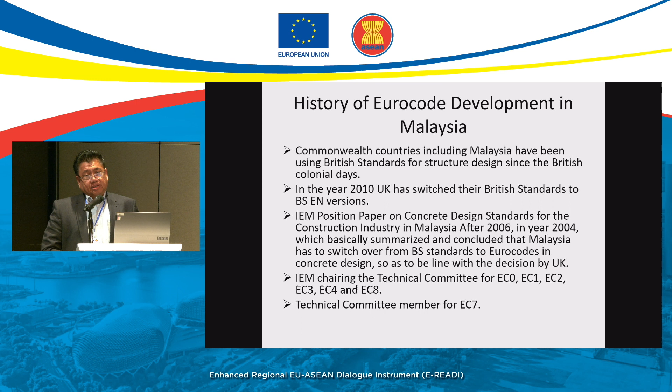So in the year 2004, the IEM position paper on concrete design standards was submitted, and we concluded that Malaysia will switch from BS, British Standard, to Eurocodes. So it is in line with the UK decisions. From there on, IEM is chairing most of the technical committees on Eurocode 0, 1, and 2 for concrete, 3 for steel, and, sorry, it is not EC4, should be EC7, and 8. For EC7, I think IEM is technical committee members.

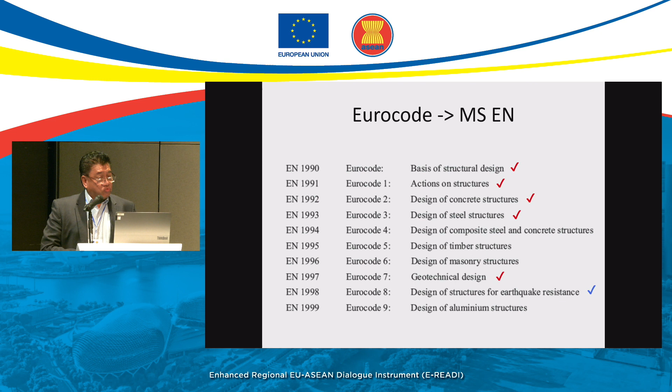So as you all know, there are many parts of Eurocodes. We have 0 to 9 for the first generation Eurocode, and we're going to have more, I think, for the second one. And Malaysia has gone through 0, 1, 2, 3, and 7, and now on 8. I'm involved with a lot of them for Part 1 and Part 2.

Well, why do we focus also on earthquake? It is a blessing that we changed to Eurocode because British Standard doesn't have any requirement for earthquake. So when we move to Eurocode, it is easier on our part to develop. We just adapt and adopt and then come up with our own national annex.

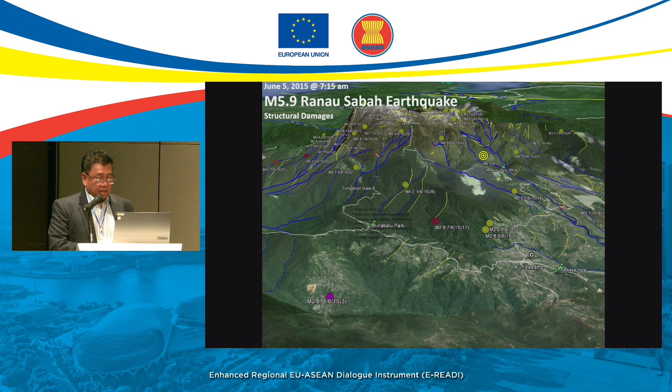And then even the schools in Ranau, most of the schools, we have a lot, I think more than 30 schools, have the same kind of damage everywhere because they are designed with weak column, strong beam. So for earthquake, we should design for strong column, weak beam. And we had a slight collapse in one of the resort areas in Mount Kinabalu. So this is, I think, the first time that we faced failure and damage to our structures.

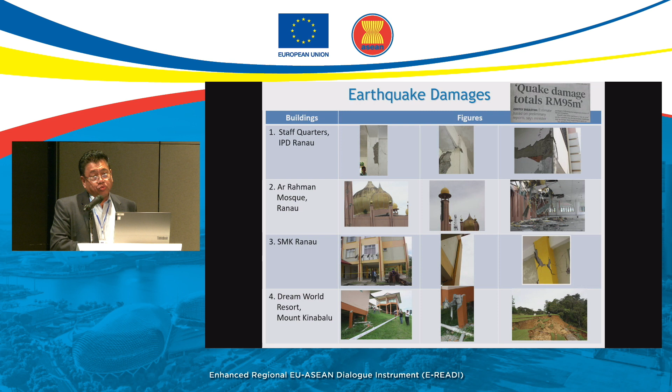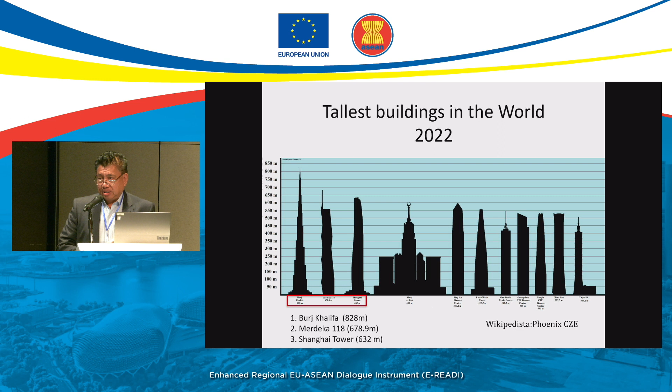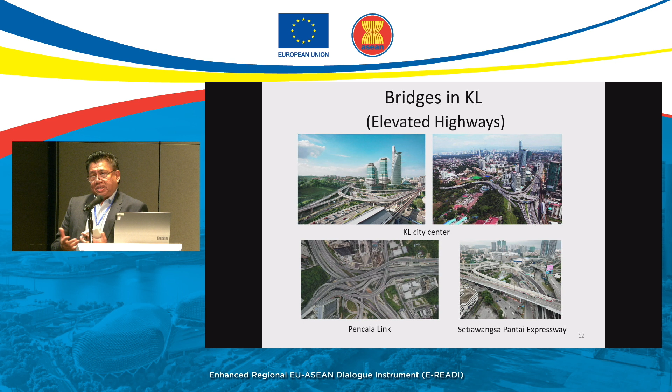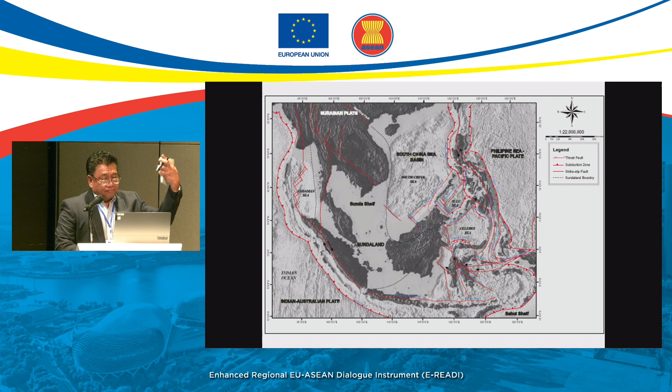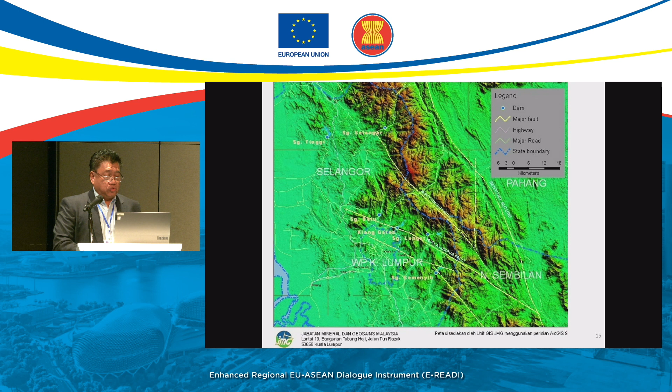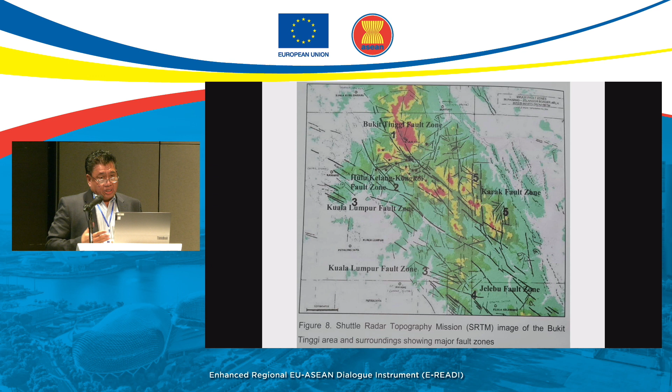So in this scenario, if we want to design for earthquakes, we have to look at the active faults around us. These are the active faults that we have, and some of the earthquakes that have happened in Peninsular Malaysia, as you can see here. Right in KL, we have had some earthquakes in the northern part of KL, about 20 kilometers away, in the area we call Bukit Tinggi. These are active areas, and we think this could ignite some bigger earthquakes later on, so we have to be prepared. As you can see, the faults are not only in the northern part, but also inside the KL area, but we don't know yet whether they are active or not. That is the challenge in terms of the geological aspect.

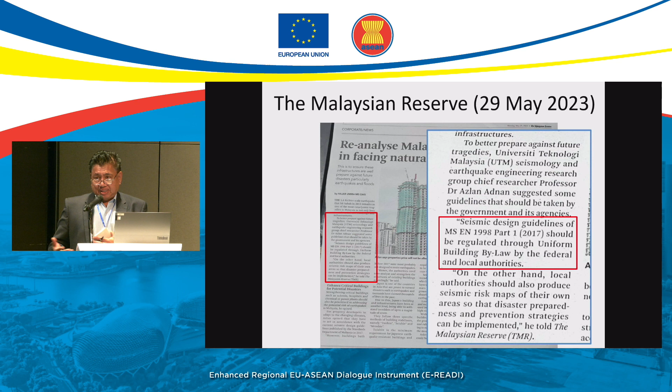So I was asked in this and gave some explanation to the press. And I was saying that we have been practicing this since the year 2017. And in another article in the Malaysian Reserve, I have highlighted that we have used seismic design guidelines of MS EN 1998. So I am also promoting Eurocode here, Part 1, and it should be regulated through the Uniform Building By-Laws. So that's another problem that we have. We may have the guidelines, but what about the implementation and the regulation?

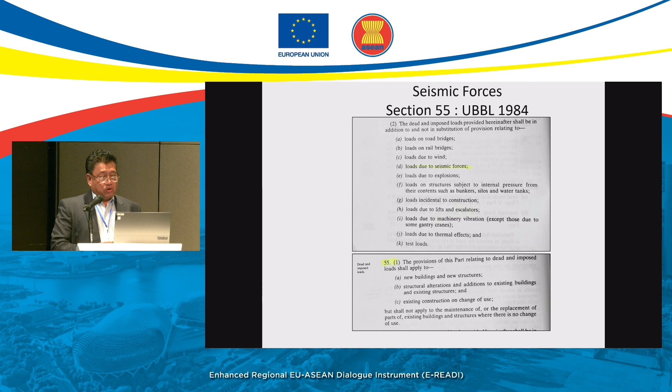So in terms of the development, we were quite surprised when I checked again: in the year 1984, our Uniform Building By-Laws had already included these seismic forces. So by right, all professional engineers have to follow this regulation, but there's no implementation or enforcement on this. And they also give guidelines on existing buildings. What should we do? So in Eurocode 8 itself, we have 6 parts. We have already completed Part 1 on the general rules, seismic actions and rules for buildings. And now we are going towards the bridges. It's just the right time for us.

So what are the documents that we need? I would just like to show you. Maybe some of you have no idea what it looks like. That is a British Standard. So we follow the British Standard, BS EN, and then we just change it to MS EN. So this is the document. You don't have any idea how thick the book is. It's just like this, not that thick, around 200, 300 pages, something like that. You just change the front page for this one.

This is the main document, the main frame. So a lot of things fall under it. And this is the Malaysian annex. See, very thin, just about 50 pages. So I think it's no problem for us to develop. We follow the format of the British Standard. It's quite easy because we just put down the table: what the UK and Eurocode recommendations are, and on the right side we put our recommendation. So I think it's not that difficult, and it is very systematic. We just deal with the national annex and change whatever we want, but we need a little bit of study. I will show you how we do it.

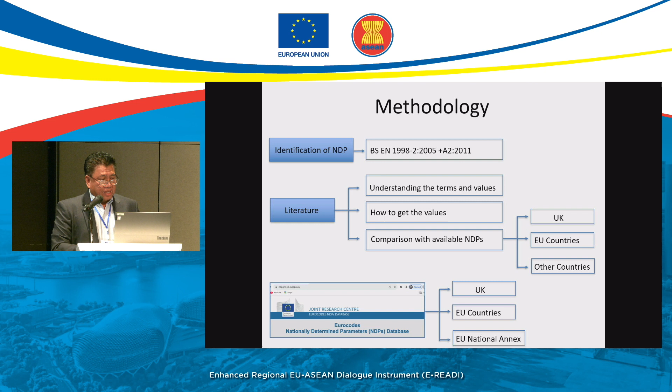So those are the websites, and we can get access to the UK, EU countries, and also the national annex, the NDP, meaning you can get access to every country's national annex in there. So I think we have about 30 to 40 countries from there.

So I have about 5 minutes, yeah.

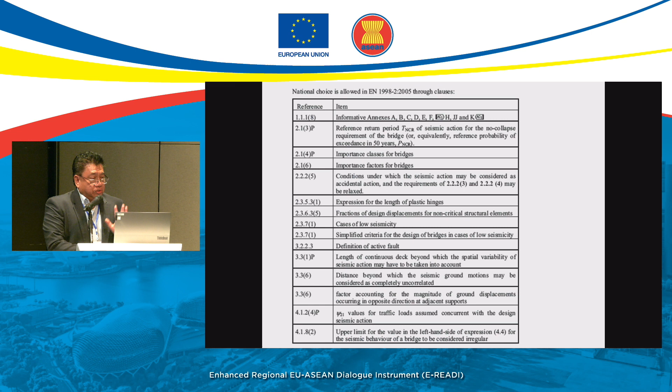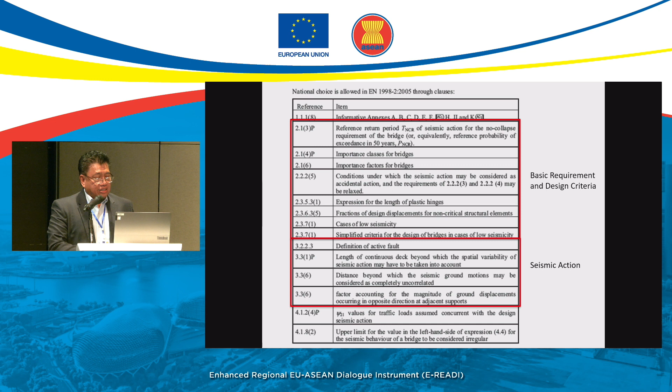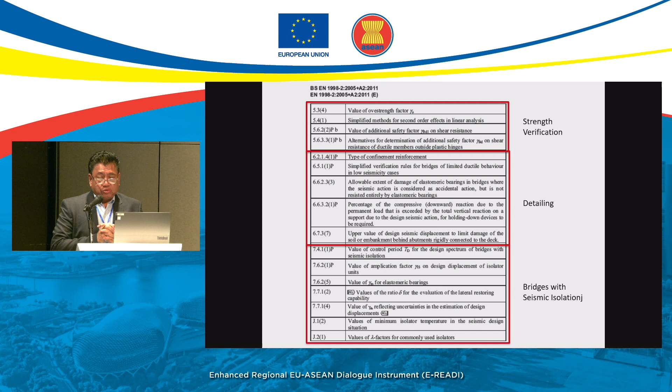So these are the NDPs that we have. So there are sections that we divided them to: basic requirements, seismic action in sections 3 and 4, analysis in chapter 5, strength verification, and we have detailing and bridges with seismic isolation. So those are the 6 items.

And what we did, we divided them into groups led by a few universities, like for chapters 2, 3, 4, led by me and some other members from other universities, including UMS, University of Malaysia Sabah. And then we have other chapters led by Defence University, University of Science, and Malaysia Rubber Board. So it's important to get Malaysia Rubber Board, the research institution of rubber, for the seismic isolation because we use rubber for that. So these are the groups.

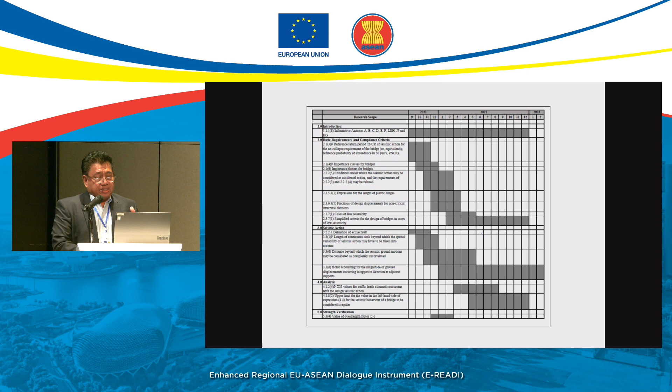Then we put the timeline or the Gantt chart for each of them and how we can achieve every NDP in there. And then we have milestones. So we have to submit reports at each stage of the study.

So the first stage of the method is to know what the NDPs are. So we make it simple. What are the NDPs? And then what does it mean? In this case, the fault. What does the fault mean? The active fault. So there is a definition of active faults, which is it has to be still active within 11,000 years, with the movement of a plate of about 1 millimeter per year.

So you can also decide yourself, if you have studies on that, active or not, how many years that you expect, the duration, that can be determined as an active fault. But this is like scientific studies. Everybody accepts this 11,000 years, so we just do it. So as you can see, most of these NDPs are acceptable for us because they are based on research everywhere. It's almost the same, but only where it involves geography, geology, then we have to do it ourselves.

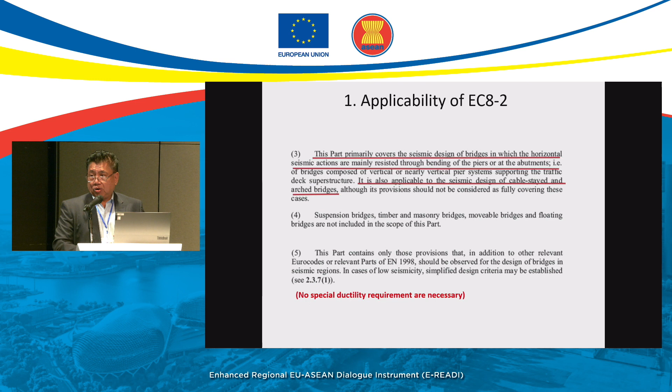So it's good because why? In Eurocode, they mention to you what this code is for. Like in this case, it says it is for columns in bending, and it is applied for cable-stayed and arch bridges also. But it does not include the suspension bridge, timber, masonry, movable bridge. So it's good for us as engineers to know right away which bridges we can use this code for. It just tells you all that right away.

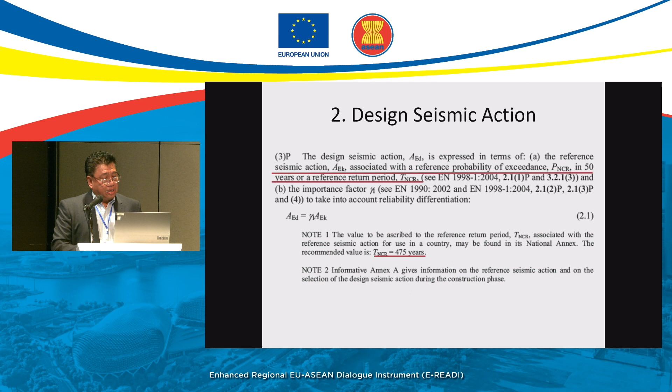So the next thing is in terms of design for earthquake, it's very important to know what the return period is. So that's number one, return period. They mention in Eurocode it is about 475 or 500 years. So there's no more argument, but you can still change it if you want, but that's the guideline.

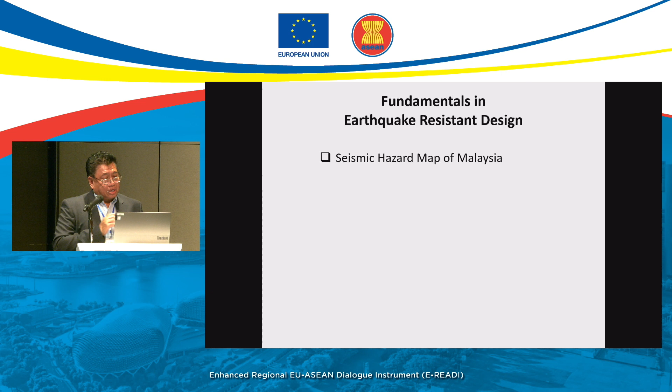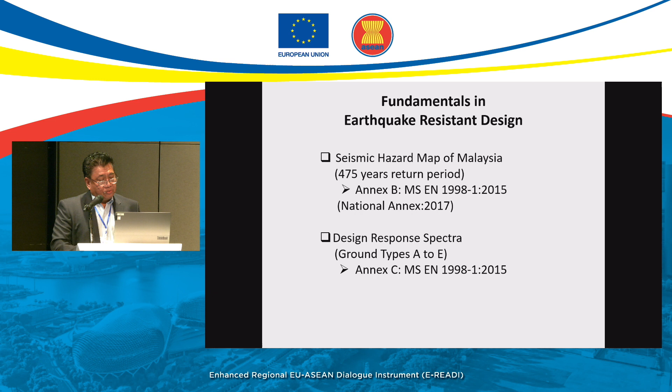So the main thing that we have to come up with in earthquake is the seismic hazard map. That's number one, because it will decide whether your building should be designed or not. So that's what we did in part one, because this is the part one job, but we still have to refer to that, and we have to come out with the response spectra.

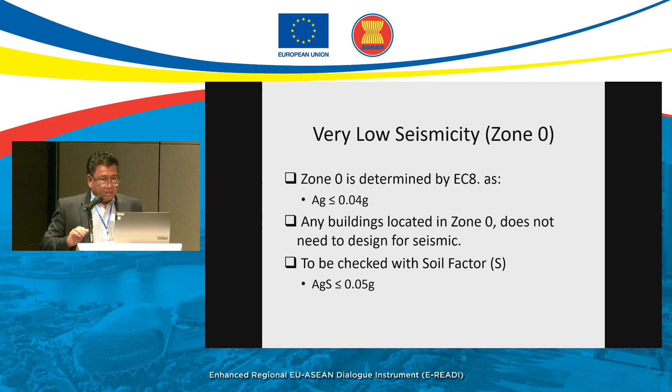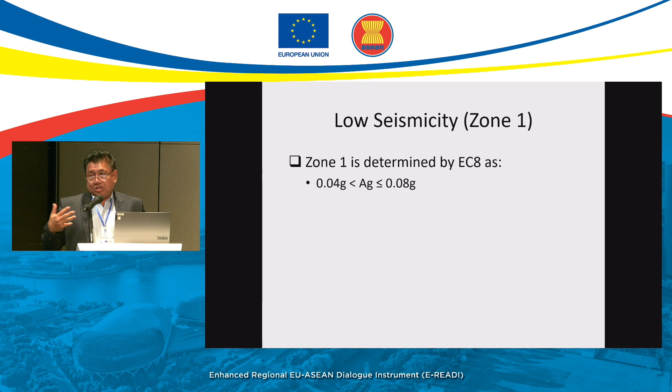The good thing, I'm sure everybody, professional engineers, they want to know whether they have to design or not. So if you can tell them that your zone is in zone 0, which is in between 0 to 4% of g, then you don't need to design. That already solves their problem. And then we have zone 1. Zone 1 is in between 4% and 8%. This one you have to design, but there is no extra detailing requirement.

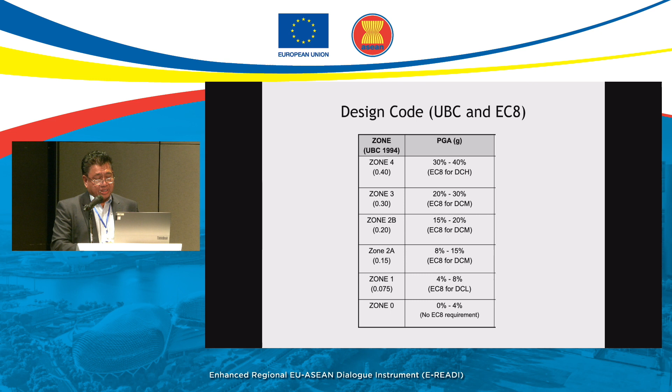Other than that, there will be another level. So I tried to compare the Uniform Building Code of the United States, 1994, with Eurocode. Zone 0, we can say it is 0 to 4, 1 is 4 to 8, and the rest is 8, 15, and so on. So in Eurocode, they have decided up to this level, and the rest we try to determine ourselves. So that's the magnitude related to that.

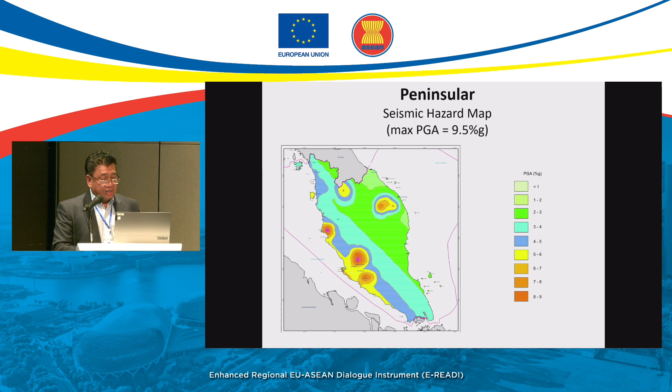So in Malaysia, very quickly, I want to share with you, these are the maps that we got. Some spots of the country have a high zone compared to the others, just about a few percent of the area. So this is very important that you have to establish Sabah and also Sarawak. Once you have got that map, then we can decide.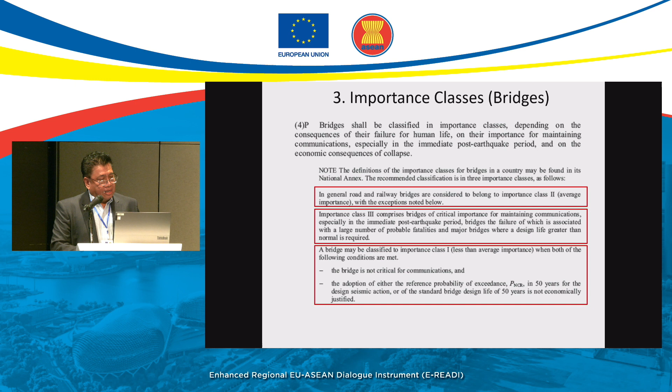So let's look at the way forward. I thought that in the earthquake community or design, we should have a unified seismic hazard map for ASEAN countries. Since Indonesia already has it, Malaysia, then we have Thailand, we can just merge. Not necessarily do it together, we can do it separately, but then we try to unify all of them.

Number 2, we can establish a technical committee for Eurocode design for ASEAN countries so that we can learn from each other. And number 3, we hope that we can be involved as ASEAN country members in the technical committee at the European level, because this is important for us to know how we get all those values.